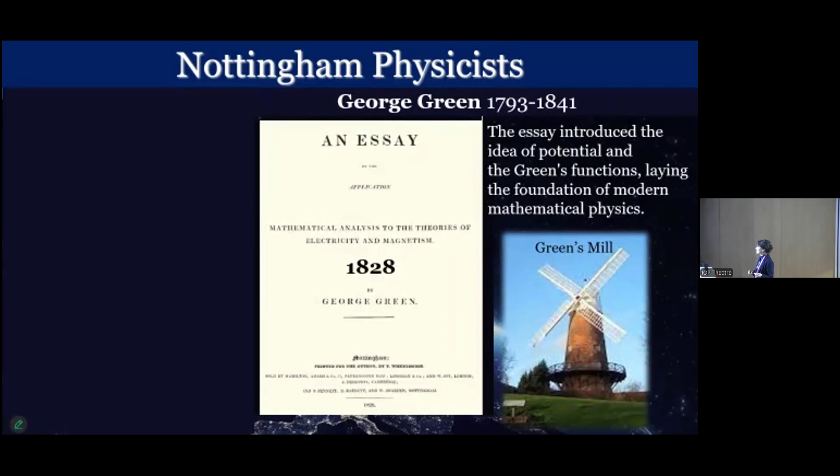This is still used these days, and it was also used by our colleague in Nottingham, Sir Peter Mansfield, for the development of MRI, magnetic resonance imaging, which then led to the 2003 Nobel Prize in medicine. There are many other examples of important applications.

So if you come to Nottingham, please visit the windmill, which is still operating as a mill, but is also a science museum. And of course, visit the University of Nottingham.

So let's go back to the main theme of this talk, which is about semiconductors that have been around for a long time. They are often referred to as the brain of modern technology, special materials with electronic properties well suited for a wide range of applications. But sometimes we forget that all this extraordinary technology is built on important discoveries in condensed matter physics.

In the next slide, there are some examples of Nobel Prize discoveries in semiconductor physics, starting from the discovery of the transistor, which was actually based on understanding of the band theory, mentioned this morning. Then there are many involving two-dimensional systems, for example the quantum Hall effect, using multi-layer structures in traditional semiconductors. But more recently, in 2010, the discovery of two-dimensional graphene completely changed semiconductor physics and semiconductor technology. Let's see the importance of this discovery.

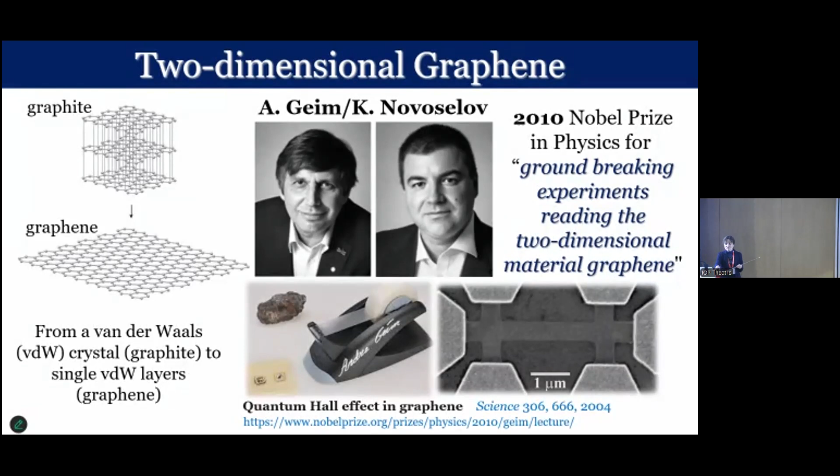This has had a big impact on semiconductor physics and technology. You all know about Moore's law and the trend of miniaturizing traditional semiconductors like silicon. But as you make silicon smaller and smaller, you reach a bottleneck, because the electronic properties of the silicon deteriorate and it becomes more and more difficult to use such small silicon or to integrate it into an integrated circuit.

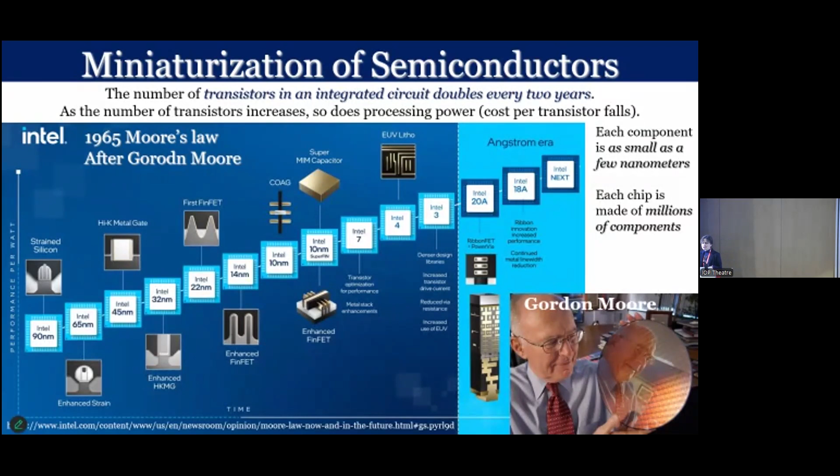But silicon is still the favorite semiconductor for electronics because of the possibility of creating large wafers and converting them into integrated circuits. So, can we do the same with graphene? Perhaps not with graphene, but following graphene, there has been an explosion of interest in a number of other van der Waals crystals that can be delaminated, converted into atomically thin layers.

This is not only important for making semiconductors smaller, but it's also important for exploring a number of interesting quantum effects that are sometimes difficult to observe with traditional semiconductors, due to constraints in combining different materials or obtaining high-quality quantum confined systems. There are a number of interesting new concepts emerging from the possibility of creating new charge and spin order in strongly confined systems, or entangled charge using two-dimensional platforms, or switching devices based on charge tunneling, like the tunnel field effect transistor.

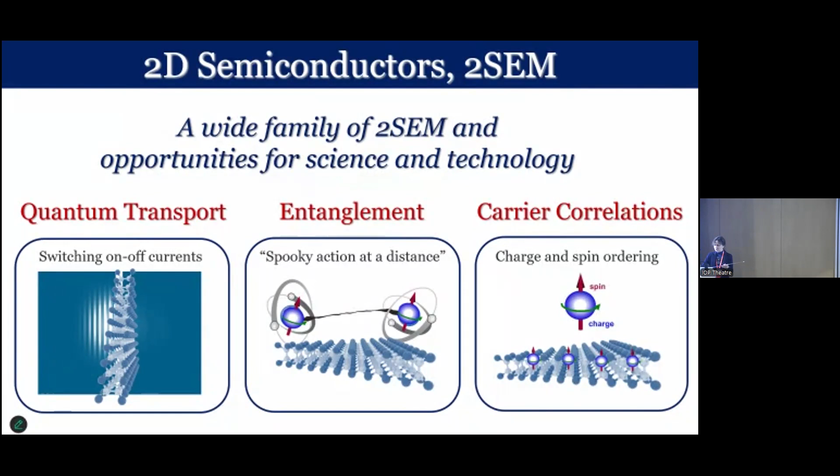So there is a large variety of two-dimensional crystals. At Nottingham, about 10 years ago, working with a couple of PhD students, we isolated, using this Scotch tape technique, a new two-dimensional semiconductor based on group III-VI elements. You can see the crystal structure of this van der Waals crystal.

Here you see a comparison of graphene and the single layer. They both have hexagonal symmetry, though one has a larger lattice constant than the other. What we discovered is that it's truly a semiconductor because it has a band gap, strongly affected by quantum confinement, and it's compatible with graphene in the sense that we can combine them.

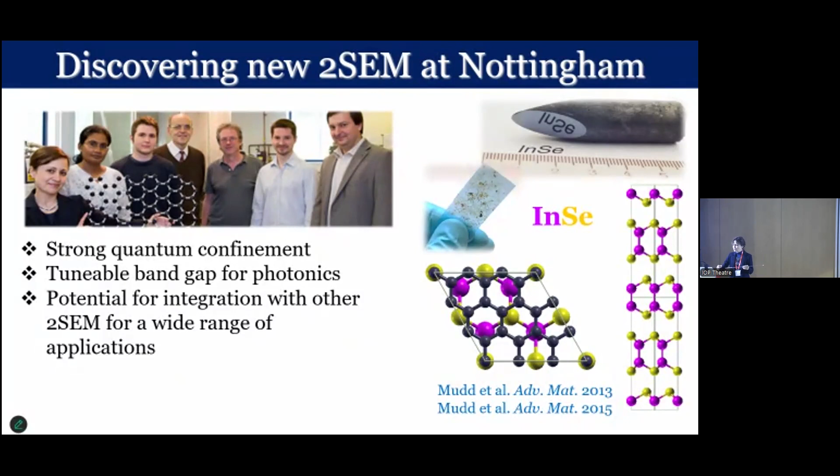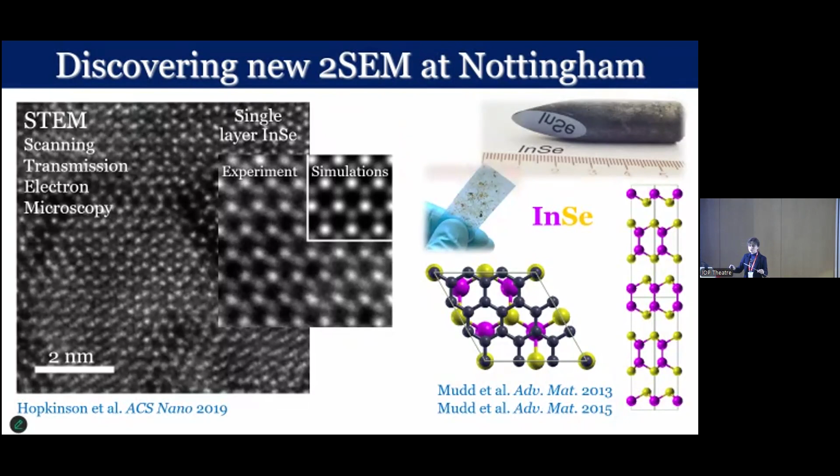We can make a quite interesting new structure based on the fact that it has extremely high quality crystal properties, like graphene, and is also resilient to deterioration in air.

For example, we worked with André Geim, the Nobel Prize winner who discovered graphene, to realize a structure that combines graphene and this two-dimensional semiconductor to make an extremely thin field effect transistor. We discovered we could get electron mobility larger than any other 2D silicon or graphene transistor, which has the issue that graphene doesn't have a proper gap, so you cannot switch the current on and off.

This led André Geim to comment that we have found a semiconductor that is the golden middle between graphene and silicon.

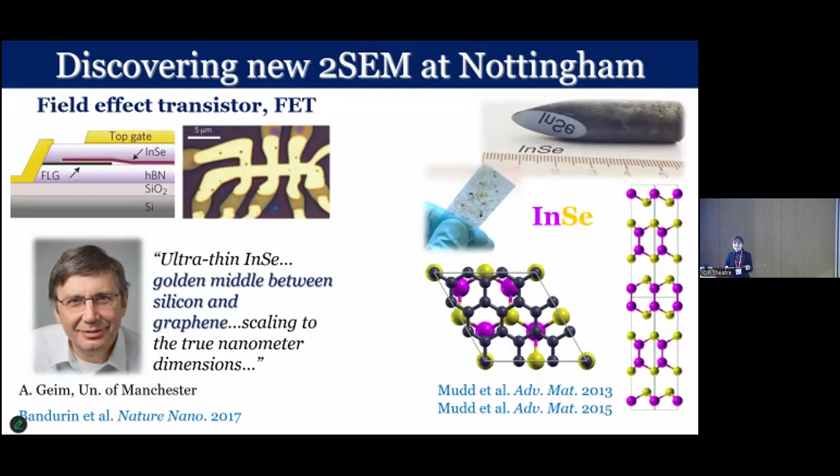An important indication of the quantum nature of the electron transport is the quantum Hall effect, the quantization in electrical conductivity that we could clearly see in this multi-layer structure, where the electrical channel is the 2D InSe.

Once you have a nice two-dimensional electron gas, you can further confine the electron motion to create, for example, a quantum dot or a quantum wire to additionally confine the transport.

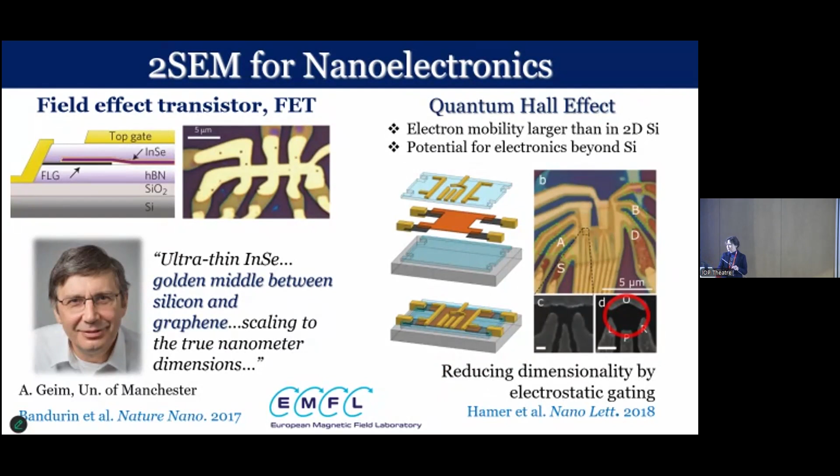So what can we do next? In his famous lecture in 1959, Richard Feynman mentioned what we can do with layered structures with just the right layers, and basically we can do everything. We can play Lego at the nanoscale. These are van der Waals crystals, so we can combine them together without the constraints that apply to traditional semiconductors.

This is what we have been doing, combining, for example, this special indium selenide semiconductor system with different van der Waals crystals, and demonstrating a number of interesting new concepts for processing information or for photonics.

These are some of the device concepts we demonstrated: spin valves that combine magnetic and non-magnetic semiconductors, and memristors that use ferroelectric layers. All these device concepts are very important for new ways of computing.

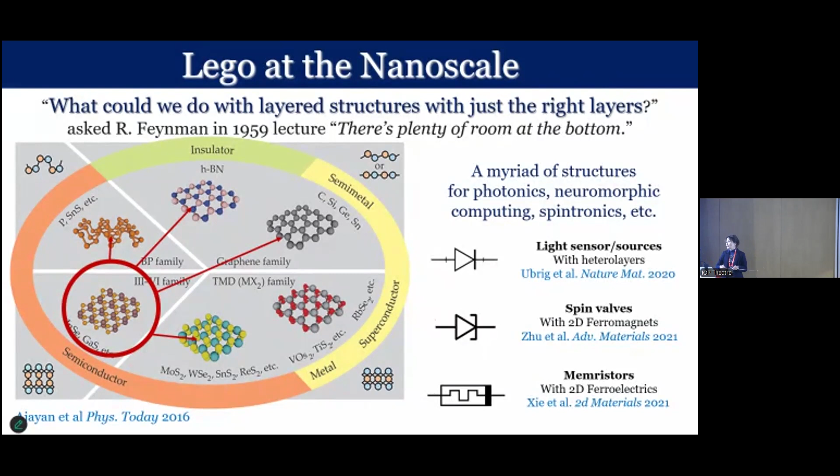This morning we heard about neuromorphic computing and quantum computing. We need the hardware in order to develop this new technology.

But how do most people make this type of new structure? The approach is very rudimentary: as I say, you Scotch tape, press on a bulk crystal, and then transfer it onto a different layer. You can see here the various steps, and this is not a scalable approach.

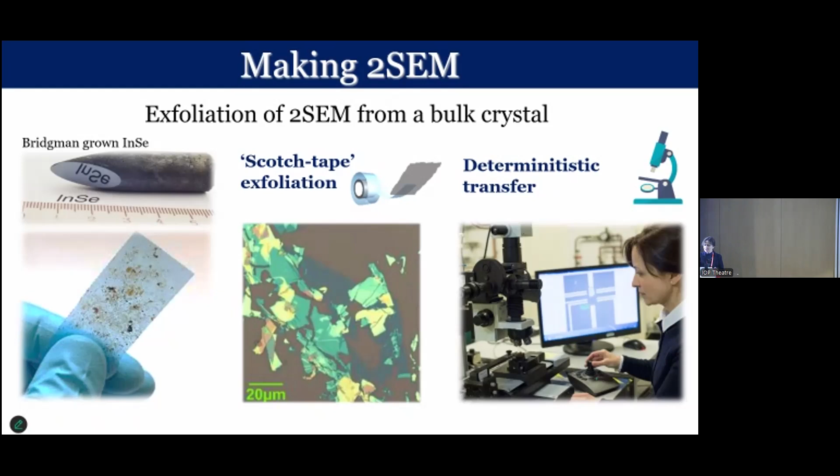I just want to give you an example of how long it takes just to transfer single layer graphene onto a particular substrate, and here I have a video. This was made by a research assistant in the lab, very frustrated by the time it takes just to transfer a single layer, so he decided to show others how this is done.

In this clip, we're looking at a needle transfer technique that we use in our lab to precisely control the deposition of 2D materials such as CVD grown graphene. We use a homemade setup consisting of an optical microscope and a stage controlled by piezoelectric motors, which allows us to move the sample with a precision of a fraction of a micron.

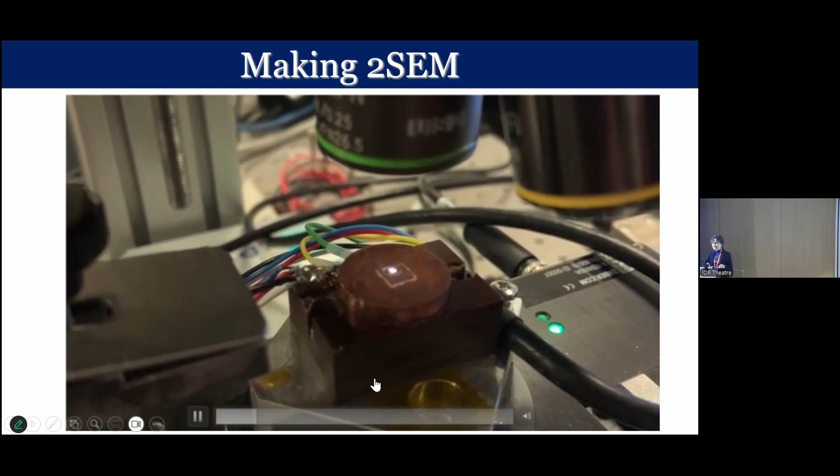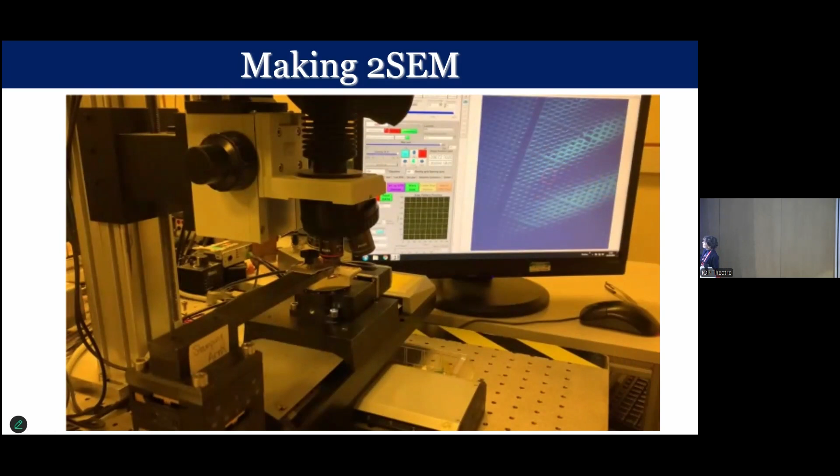Here's a close-up of the stage where we mount our sample. In the centre of this copper coil are the CVD graphene strips we'll be using to transfer onto our substrate. Through the microscope we see this dotted pattern, and each dot, in theory, is where there should be a graphene strip. You can see the individual strips here in this close-up; each strip is about 10 microns wide and 40 microns long. The graphene is covered by PMMA, which makes it easily visible under the microscope.

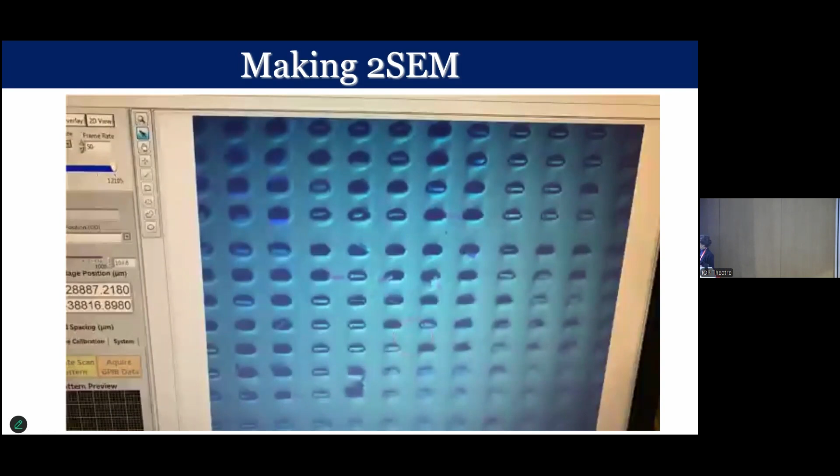For this technique, we use a glass needle that has been formed with a very fine tip, about 10 microns, similar to our graphene strips.

The first step is to bring the needle close to the graphene strips. We do this by changing the focus of the microscope between the needle and the graphene, then adjusting the micro manipulators on the stamping arm to bring the needle down. As well as adjusting the height, the micro manipulators can be used to move the needle in the plane.

So we can align the tip above a specific graphene strip. Once the strip has been selected, we bring the needle into contact, and we know this has happened because we can see a slight distortion in the surface.

We then have to apply some pressure to the graphene to dislodge it from the surface. This can take a few attempts of jiggling the needle around to get the PMMA on top of the graphene to stick to the needle and completely dislodge it.

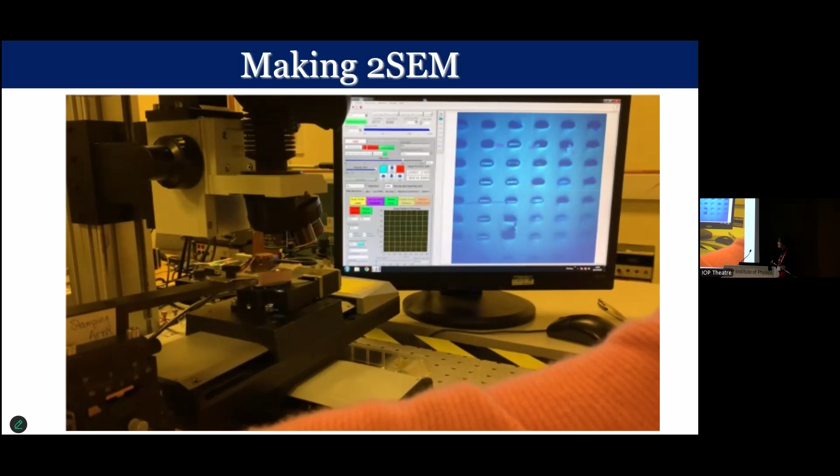Now that we have the graphene on the end of the needle, we can move it around to our desired location.

So now we need to bring our substrate into the view of the microscope. Here we're using a sapphire substrate with generously sized gold contacts. Similar to picking up the graphene strip, we bring the needle close to the surface of the substrate.

We have the capability to independently move both the needle and the substrate in all three directions, as well as rotation and angle. This gives us the power to deposit the graphene, and of course any other 2D material, on a substrate of our choosing with extreme precision.

Which means we can use a similar technique to build vertical structures of 2D materials, just like a slightly more complex version of Lego. Once we bring the graphene into contact with the surface, it sticks via van der Waals interactions, which are stronger than the sticking force of the needle, so when we retract the tip, the graphene is left on the surface of the substrate.

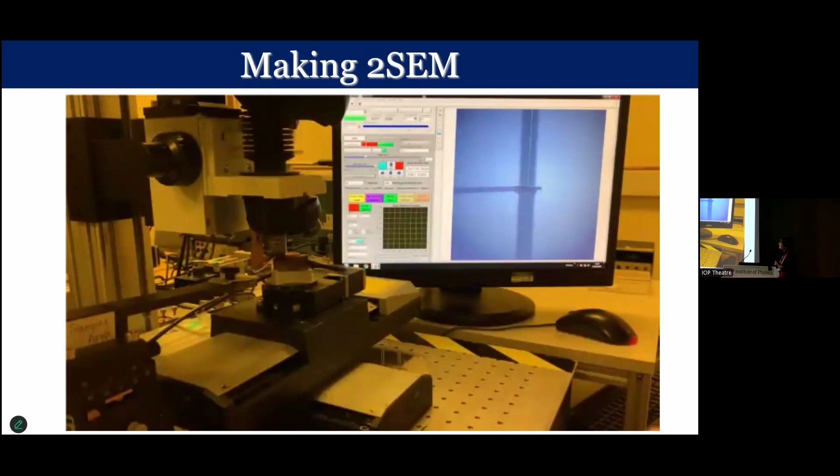We then bake the sample at 180 degrees Celsius for about 10 minutes to improve adhesion, and then perform solvent cleaning and anneal at 300 degrees Celsius to remove any PMMA and impurities on the graphene surface.

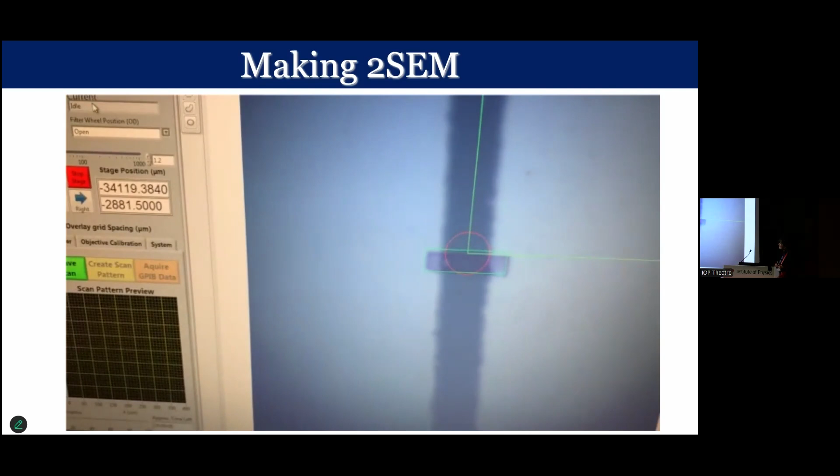Okay, so this is just to show you how difficult it is dealing with this atomically thin layer. And this is just one of the multiple steps in the fabrication of a device.

So this is why a few years ago, in about 2018, we realized that we had a way we worked in making two-dimensional material in a different way, using a bottom-up approach rather than using a bulk crystal and reducing that to the layer.

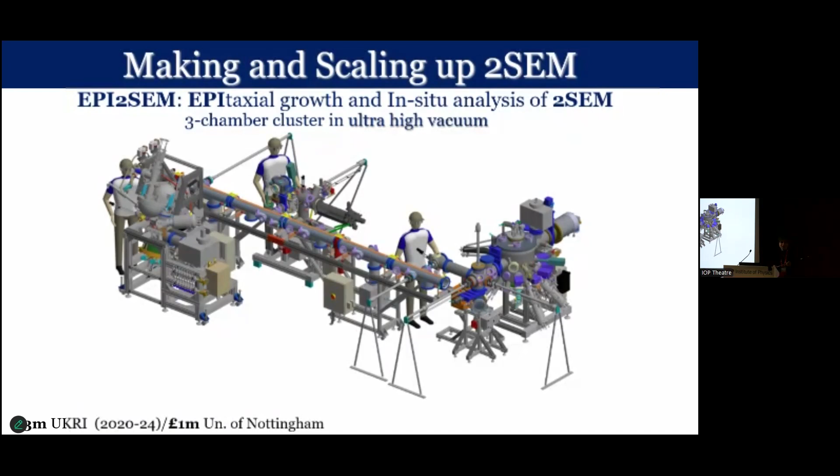So we came up with this idea of a new facility that we call EPI2SEM, which stands for epitaxial growth and in situ analysis of two-dimensional systems. You can see it's a 3-chamber cluster in ultra high vacuum. So it's quite a complex system.

We have a first chamber. When I say UHV, ultra vacuum, that means 10 to the minus 10 millibar. So we really need to have a high purity environment to grow or develop this system, and also with atomic resolution.

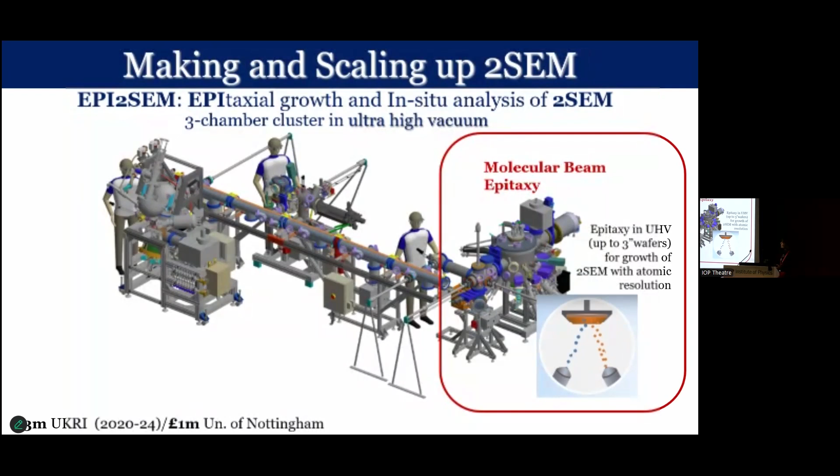This is how it works. Elements are sublimated from the solid source and then crystallized on a substrate kept at a given temperature. This is done by a technique called molecular beam epitaxy.

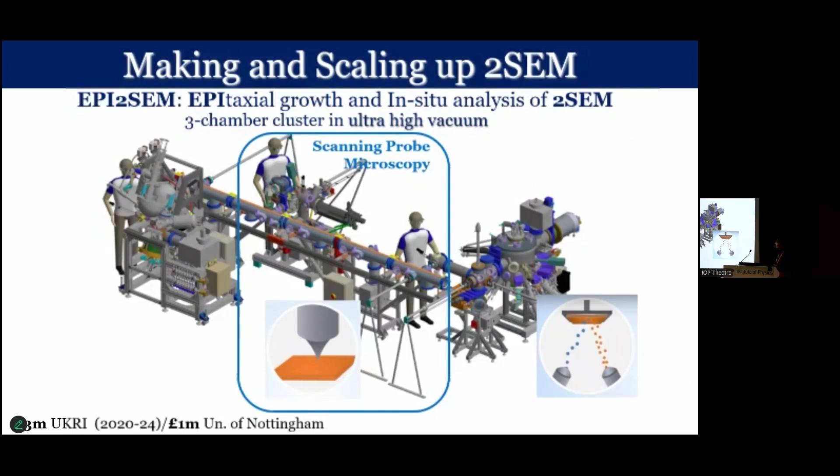Then in ultra vacuum, we take the sample to the second chamber where we look at the morphology using techniques like scanning tunneling microscopy or atomic force microscopy. And then the third chamber, actually a quite complex instrument, uses the photoelectric effect, let's say electron spectroscopy, to measure the composition and the electronic structure of the material.

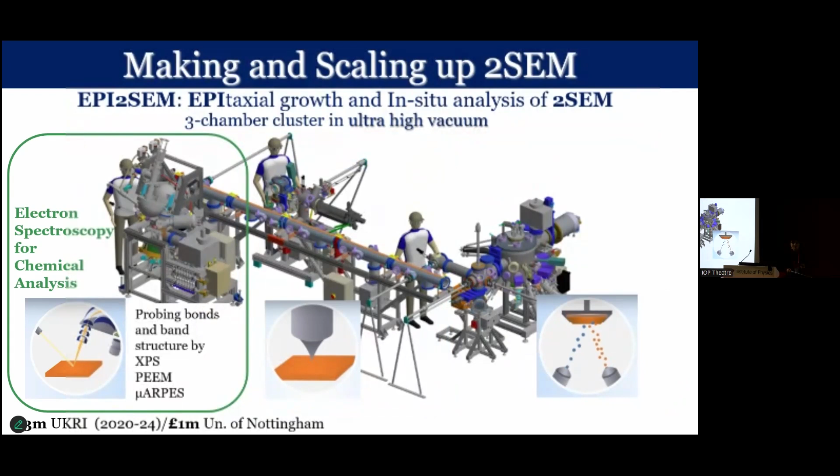So the idea is that all 3 chambers are connected in ultra vacuum. We can operate them independently, but we can also move the sample from one chamber to the other in UHV. And so this is the idea of cooking and tasting.

So it's a different way of developing material using a system where you can try your recipe, you can see what you have grown by looking at both the structural property and the electronic property, for example, using angle resolved photoemission electron spectroscopy to measure the bands of the system.

And we have entry and exit points, which means that if our material is good enough, then we can take our sample to other facilities, for example, to use them to make devices.

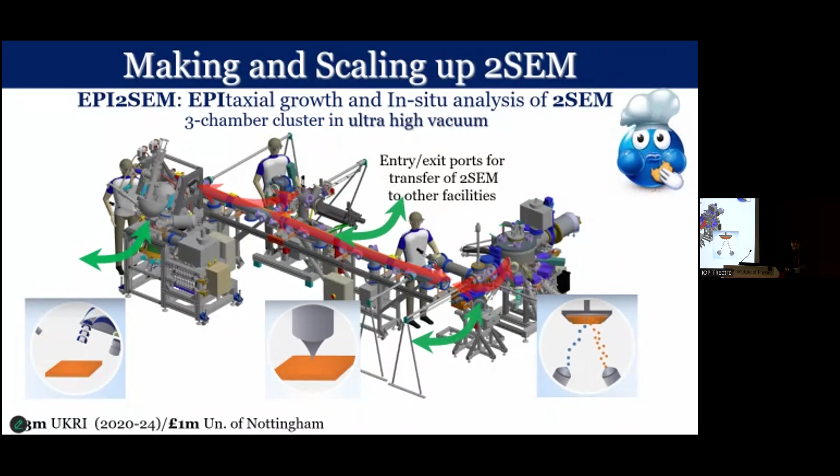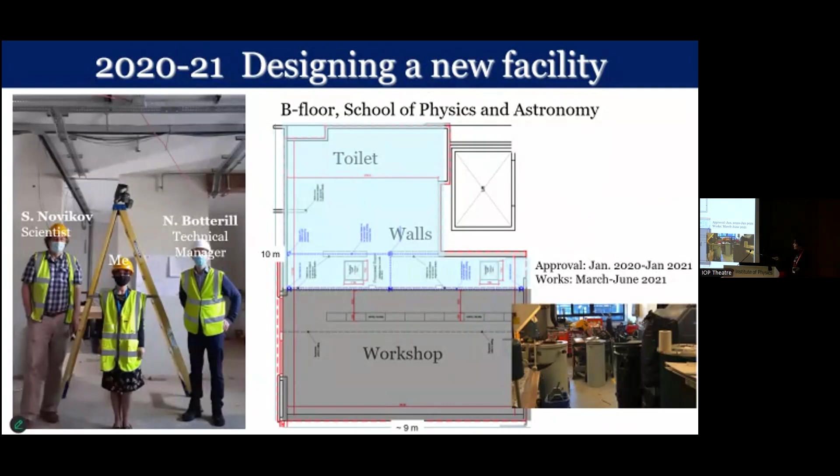So to establish this facility, we had to create a new lab, quite a large lab, converting a workshop and a toilet into a large lab with this very long, what we call a linear transfer line, that connects the different chambers in UHV.

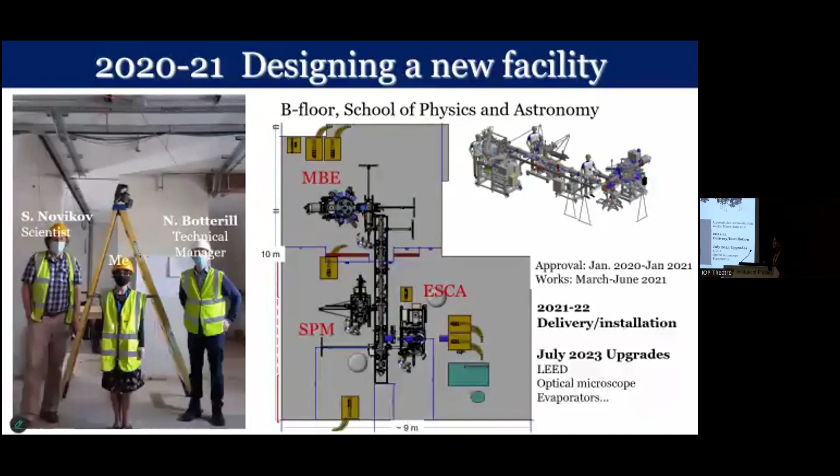So we received the various components of this bespoke system in 2021. Here you can see the picture of all these huge boxes that we received, and we filled completely the lab space.

And this is how the lab looks like today. We completed the installation in 2022. So you can see the long linear transfer line and the three chambers.

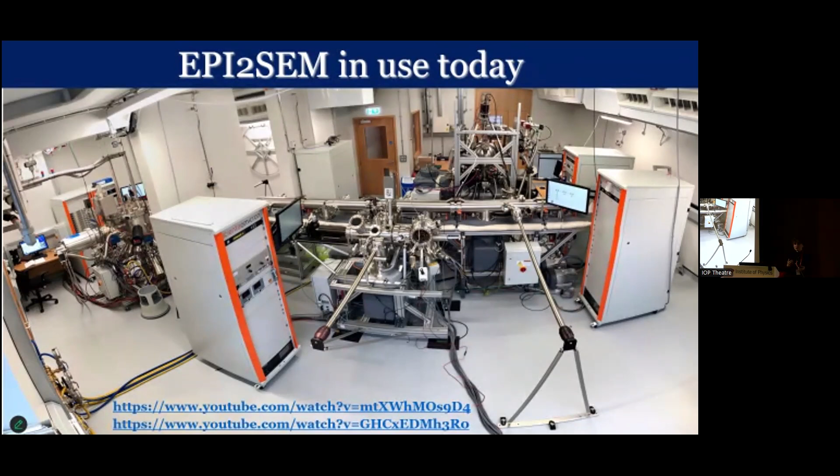This is about 10 meters in length, and this linear transfer line is critical to reduce mechanical noise, which is important to conduct measurements on atomic scale systems.

I want to give you an example of things that we have been doing since we installed the system. We focus on creating this new building block for electronic components based on this semiconductor, gallium selenide. It's a van der Waals layer, a single van der Waals layer, sitting on top of graphene.

And there is this van der Waals gap because the two layers do not interact. So we grow this system in UHV, then without breaking the vacuum, we move to the electron spectroscopy study, so we can visualize the energy dispersion of the electrons. We can see the band structure, and we can discover this very unusual dispersion.

This is called an inverted Mexican hat type of dispersion with extremely flat dispersion corresponding to large electron mass. And Van Hove singularity in the density of states - they are so important, for example, to then explore electron correlation effect.

And we can look at the symmetry. We can understand how the two layers align relative to each other by looking at the energy surfaces, and explore how this band structure changes as we go from single to multiple layer. So we really have control now of this nanoscale system with atomic resolution.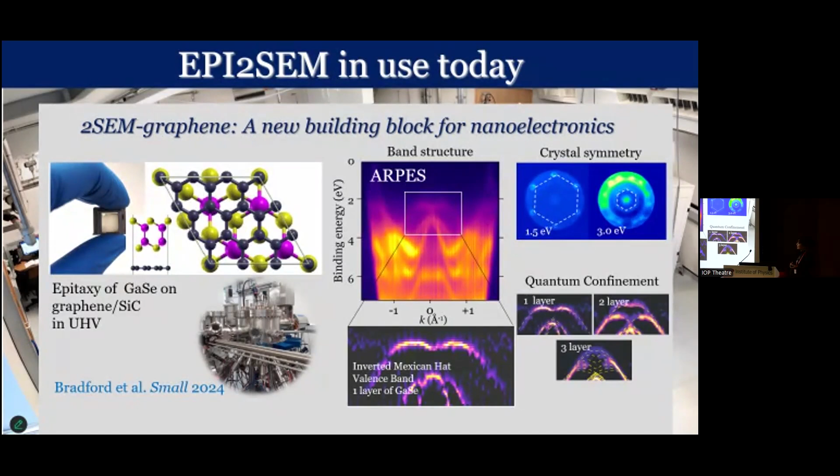What is interesting is that we can then start engineering the electric field at the nanoscale. For example, as you bring one layer next to each other, there is a charge redistribution at the interface. So, for example, one layer becomes more negative than the other. And this corresponds to an electric field that can be quite significant, something like a few hundred meV over a length scale of a few angstroms.

And so we can use this built-in electric field to realize photosensors, where this built-in electric field is used to separate, for example, photocharges, electron and hole, generated by light.

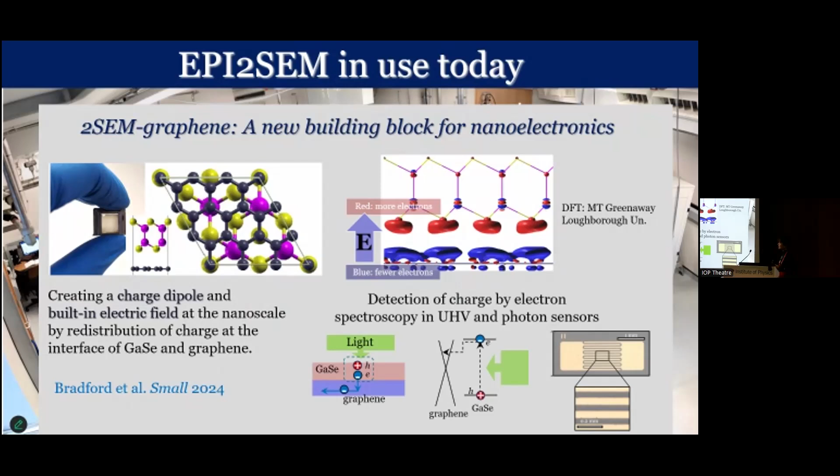And I think, so what's next? We are looking and developing different systems. And as I say, this is our first restaurant in Nottingham, where we cook and taste two-dimensional material systems.

We want to link to other facilities in the UK and abroad. This is possible because we can use UHV suitcases to bring around materials, still maintaining this very clean environment. And the facility now is open for collaboration with anyone who is interested in developing this space.

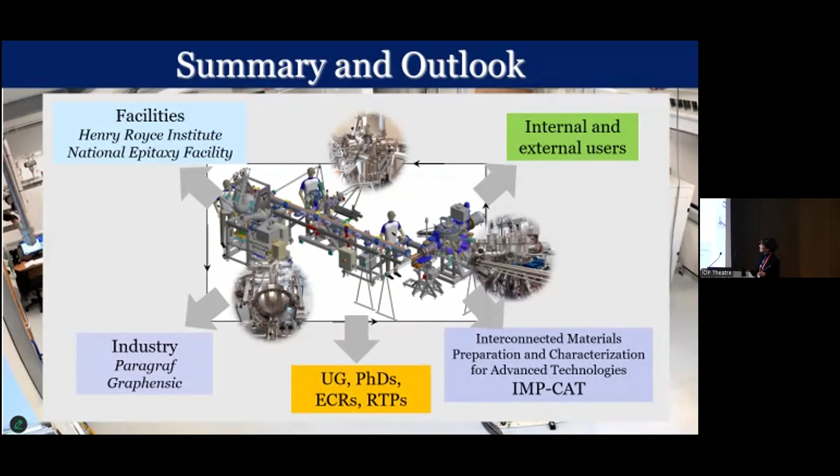And so let me conclude with two things. First, acknowledging the contribution of so many students and staff, both in Nottingham, but also the funding bodies and collaborators. And we have provided material to many institutions in the UK, abroad, and we're still willing to create new partnerships.

So because I have time, I perhaps can show you the video of when the facility was delivered and then installed, to show you the scale of the challenge.

And I will stop here. Thank you very much.

Very nice talk. I wonder, wouldn't you ideally have this facility inside a clean room where you can also do the fabrication and device work? It's 4 or 5 million more, yes. Well, I'd say 50 million - I think our funders are not ambitious enough.

Okay, so of course, there is no limit in the complexity and how large the facility can be, but you also want to make it practical to access. And so what is important is that inside the system is clean, so we don't need a clean room to operate.

Sure, of course. And of course, using a suitcase, we can transfer material from UHV to another UHV facility. So, but of course, ideally, you want to have a big lab with everything, but then it becomes, as I say, less practical, because already with this system there is lots of coordination going on. We meet regularly every Friday morning at 9 o'clock to review what we are doing, because it's like 3 different experiments. We need to ensure that UHV is maintained, and nobody does anything like entering a sample that may contaminate it - so yeah, it's quite a difficult system to work, but we don't need a clean room.